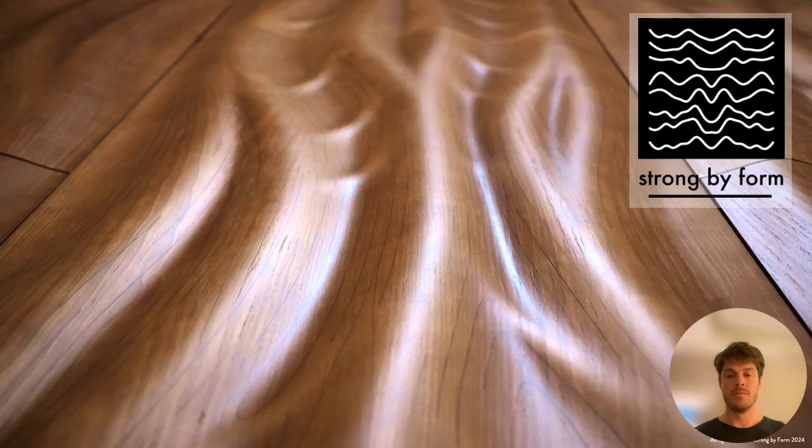The future of wood. A future where we can build twice as many timber buildings as we do today, but only using half of the trees, making construction more sustainable and productive. Also, we're making wood eligible for new uses to make our built environment more sustainable.

But first, I have to present you a problem. And the problem is that we have to build 13,000 buildings every day for the next 25 years across the globe just to deal with population growth. It's good stuff because it implies creating jobs and economic development. But guess who's not really happy about it?

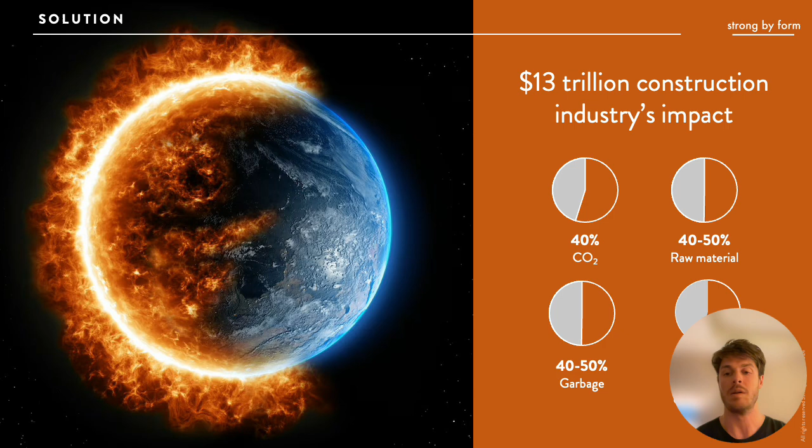Our dear planet Earth. Because the $13 trillion construction market is responsible for a large share of global emissions. And today we're witnessing how millions of people suffer the effects of consuming, emitting, and discarding billions of tons of materials and CO2. Because of this, we looked around for alternatives to traditional materials and got inspired by nature.

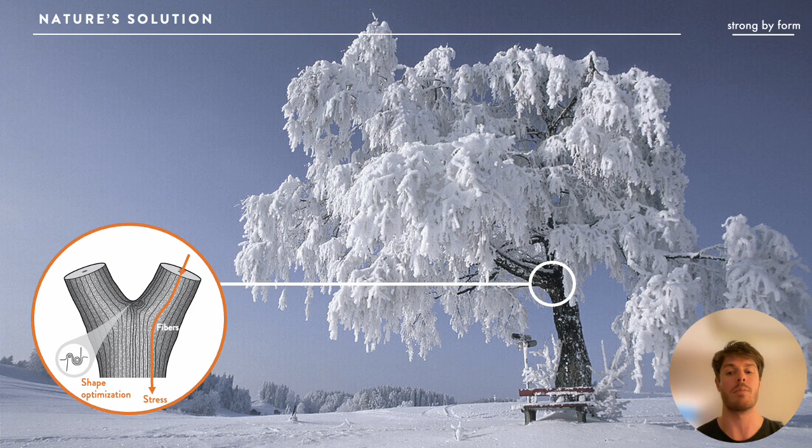Because every day, nature creates millions of cubic meters of structural materials in the most sustainable and efficient manner. And as a result, we've created a timber-based composite that replicates the internal structure of trees. Trees are very strong and lightweight. And we've called this Woodflow.

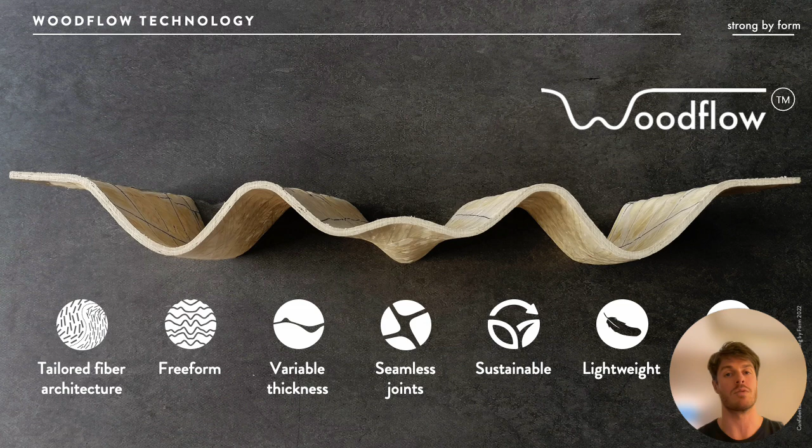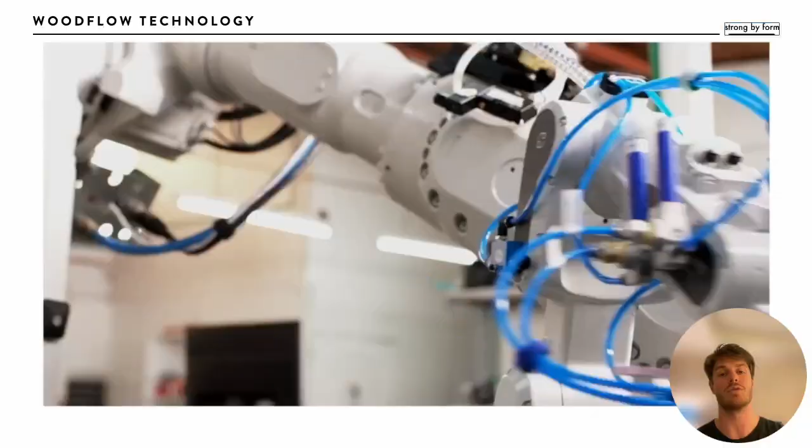Woodflow is the only biocomposite technology capable of being deployed in the millions of square meters as a structural material for construction, while achieving the level of performance to weight ratio required by automotive. Moreover, our fully automated manufacturing technology enhances sustainability and productivity, two things the industry is craving for. Our goal is to prove that technology has reached a level where there is no trade-off between sustainability and profitability.

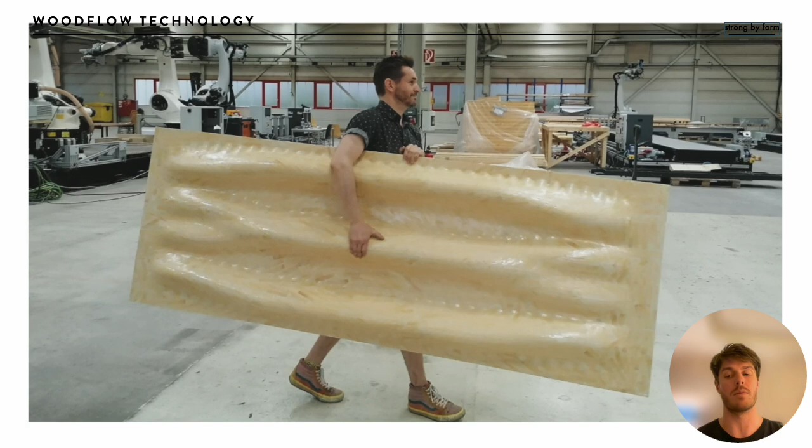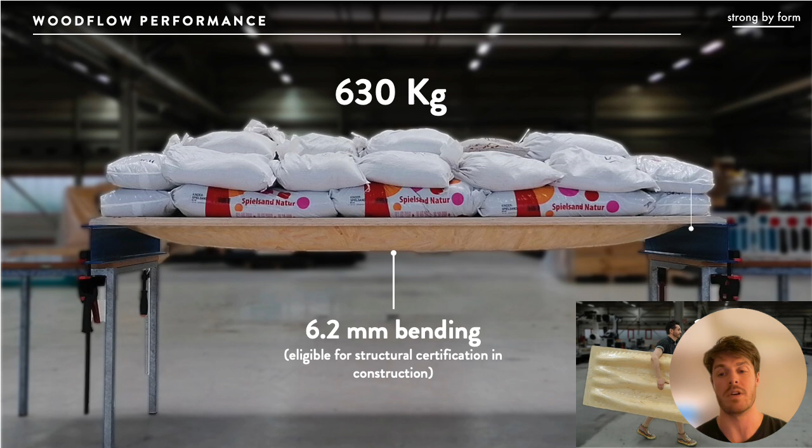And it works. We use our design to fabrication technology to develop a prefabricated slab prototype. Weighing under 35 kilograms, it leverages our algorithmic intelligence over mass to achieve structural performance. And the results are impressive, as Woodflow withstands loads with less than half the bending required to comply with European norms. This allows Woodflow to achieve very long spans, a crucial element for value proposition.

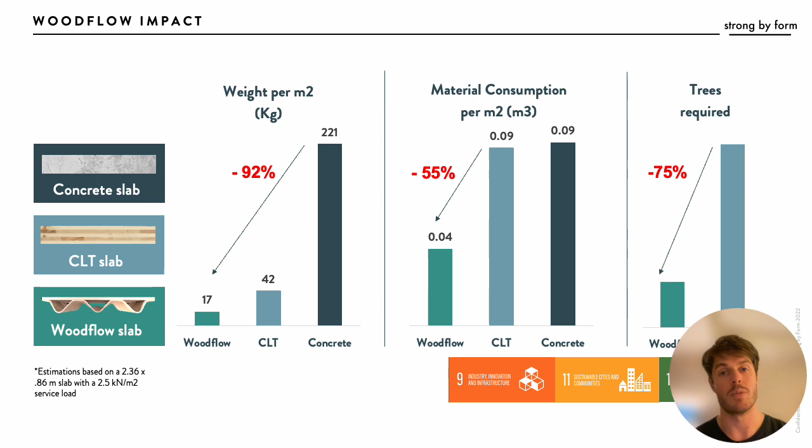When compared to traditional alternatives like reinforced concrete or cross-laminated timber, Woodflow excels by reducing weight and material requirements. When compared to CLT, there's a 75% reduction in the trees required for structural slabs. This in turn translates into a lighter structure overall. Lighter building means lighter structure and foundation, bringing a compounding effect to decarbonize our built environment.

These developments will allow projects like high-rise buildings made from timber a reality, paving the way for a sustainable construction industry. While deploying our early products, we're finalizing the development and certification of our Woodflow core structural slabs. A high-performance CLT is 60% lighter and 7% stiffer than regular CLT, allowing Woodflow core to achieve spans beyond 10 meters in an economically feasible manner.

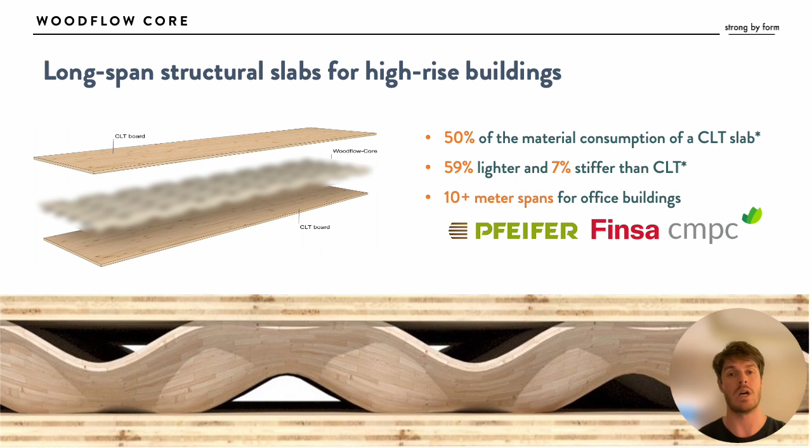And this will allow timber construction to move from residential to office and commercial buildings. We have also identified huge opportunities in mobility as well, prototyping interior and exterior components, where we have two different finishes, mantle and pixel, that can be made in turn from any wood species and from several different coatings.

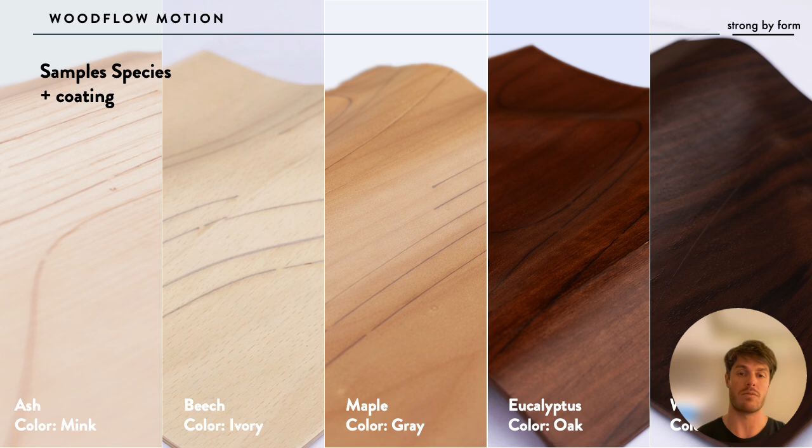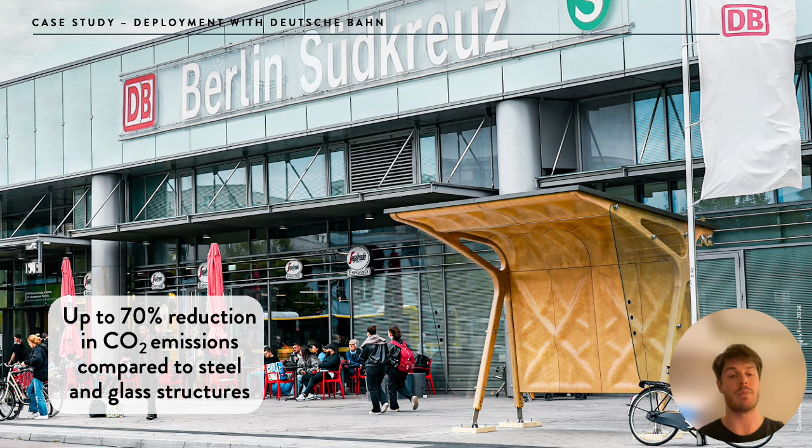Our early products will start in the construction sector, where we will deliver high impact and low entry barrier products like freeform interior cladding. Then we'll move to more complex products that require higher certification barriers like exterior facades. Here, we prototype an exterior weather cabin with Deutsche Bahn, where we showed that our structural capabilities achieve a 70% reduction in CO2 emissions when compared to traditional infrastructure.

Today, we're exploring opportunities with leading companies in construction and automotive who are helping us validate our technology and deploy our first products. Some of them have even invested in us.

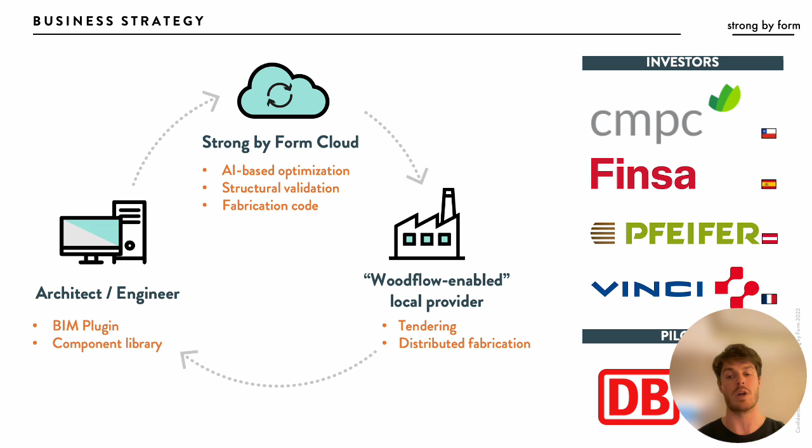To scale, we will develop a cloud service that will allow designers and engineers to create their own Woodflow products. We will license our manufacturing technology to create a global network of Woodflow manufacturers. Our development roadmap involves scaling our manufacturing capabilities next year to serve our first commercial projects while we continue developing structural and automotive solutions.

We're up to the task, but we also understand that the challenge is huge. So we've established a worldwide network of leading executives and scientists to get the best possible advice.